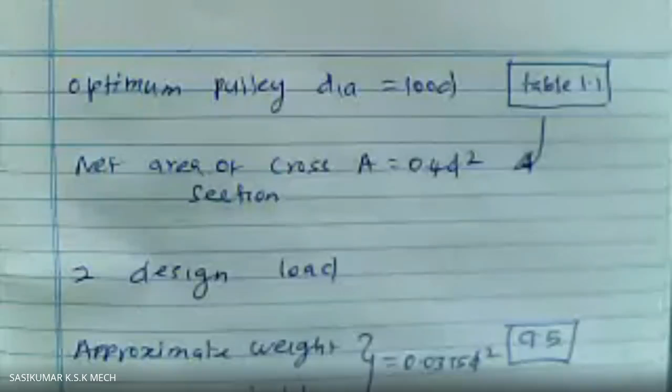Chain drives, where an intermediate link like a belt or chain is needed to connect the driven wheel with the driving wheel. Okay, so there is no requirement for an intermediate link in the case of gear drives. Gears transmit power from one wheel to another wheel by means of positive contact. By means of the positive contact, the gears are transmitting power.

Okay, so this figure shows a drive of, say, a tractor. In a tractor you need the wheels to be rotated at different speeds, so for that you need these kinds of gear arrangements. Wherever you have power transmission in a positive way, you need to have these gear drives.

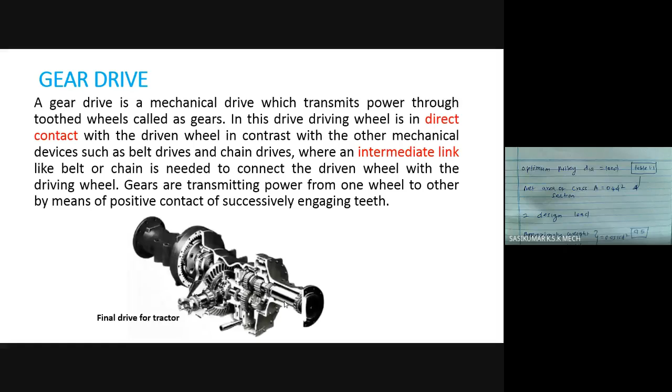When it comes to the advantages of gear drives, they are more compact than belt or chain drives, so they need less space. Gear drives have high efficiencies, meaning there is minimum loss of power during transmission, and they have very long service life and high reliability as well, whereas belts and chains have more wear and tear problems than gear drives.

So gear drives can transmit more power than the belt drives, and they have a greater range of speed ratios. The speed ratio is the ratio at which you transmit power from one shaft to another shaft. They have a constant speed ratio owing to the absence of slipping. Since there is no intermediate link, there is no slippage, so they have a constant speed ratio. And metal gears do not deteriorate with age, heat, or oil.

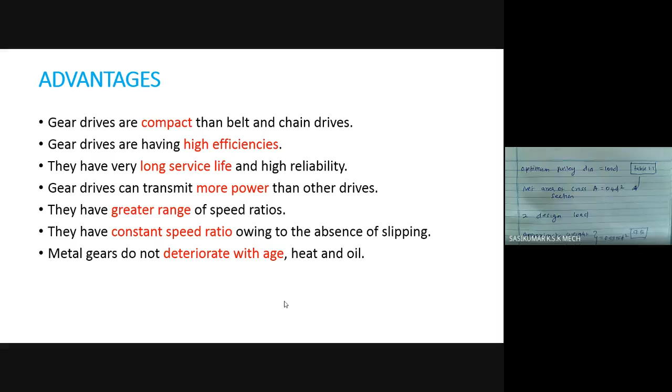It also has certain disadvantages when compared to flexible element drives. Design and manufacturing of gears is more complicated than manufacturing pulleys or belt drives. It produces noise at higher velocities. And for long center distances, gears cannot be used for power transmission. So the advantages of flexible element drives are the disadvantages of gear drives.

They require careful maintenance and proper lubrication. You know that gears are always immersed in oil. In a gearbox you have a casing, and all the gears are immersed in oil, so that they have proper lubrication and are maintained for a longer service life.

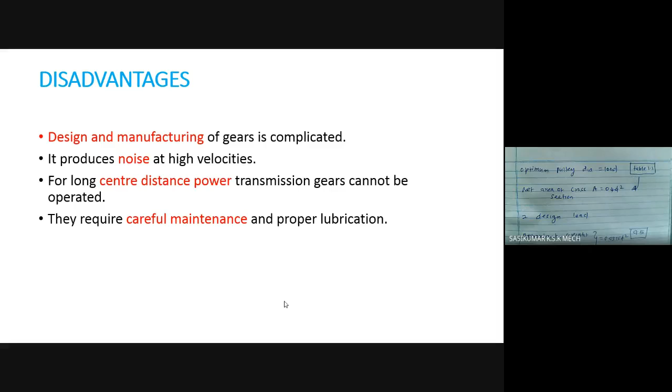Then comes the classification, how we classify gears. Generally gears look like this. Based on the nature of the arrangement of teeth or the position of the gears, gears are classified in different ways. First, based on the position of the gear shafts: if the shafts of the two gears are parallel, they are called parallel spur gears, parallel helical gears, and parallel herringbone gears. In those cases the shafts have parallel axes.

The next one is intersecting gears, like bevel gears, straight and spiral bevel gears. In bevel gears, the axes are perpendicular to each other. The third category is non-intersecting and non-parallel, where crossed helical gears are used.

Neither axes are parallel nor intersecting. The last category is the worm gears. So in worm gears, you have the hypoid gear, spiroid gear, planoid gear, beveloid gear, helicon gear, and face gears. So these are all the classification based on the position of the gear shaft. Okay. So in general, you have four kinds of gears: spur gear, helical gear, bevel gear, worm gear. These four gears are in general called, but based on the arrangement, it may be called like this.

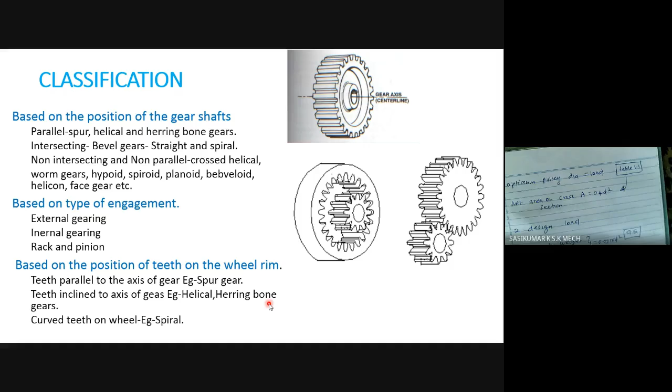per second. For medium speed gears classification, the velocity range falls between 3 to 15 meters per second. For high speed gears, it is greater than 15 meters per second. So these are all the classification based on the peripheral speed of the gears. Okay.

Next, based on the teeth profile, it may be classified as the involute profile or cycloidal profile. Okay. So based on the pressure angle, it may be further classified as gears with 20-degree pressure angle and gears with 14.5-degree pressure angle. So based on the tooth height or working depth, it may be classified as full depth gears and stub gears.

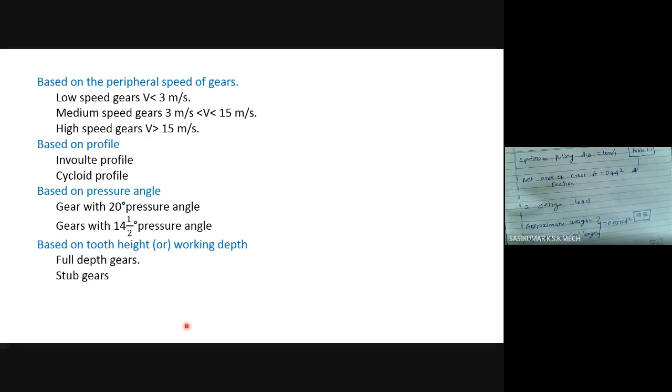So these are some of the gears commercially available and commercially used. Okay, and this is the spur gear. This is the helical gear. Here teeth are inclined, and this is a worm gear. So in worm gear, the driven part is called a worm gear. The driving part is called a worm, and this is exaggerated worm, and this is a rack and pinion. Okay, so in some cases the rotary movement needs to be converted into linear movement. In those cases the rack and pinion is used.

Okay, and here you have a compound gear. Compound gear in the sense more than one type of teeth, or two wheels having different diameters. That is the compound gear. And this is a straight bevel gear. So bevel gears are used to transmit power at right angles to each other, particularly in the crown and all. So there you have the bevel gears used for transmitting power. And the next category is the mitre gears. So mitre